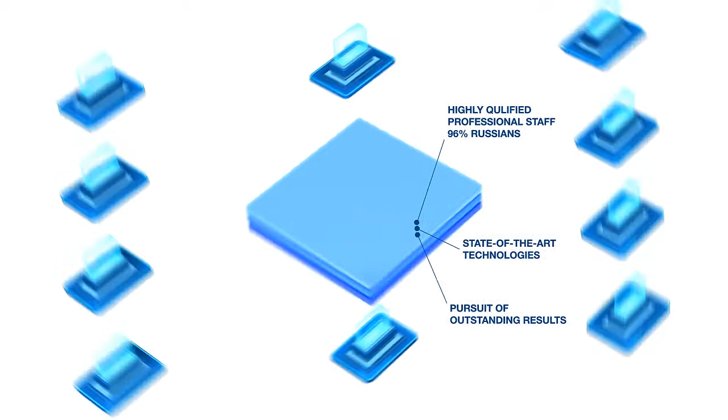This approach has created a strong, fit-for-purpose local portfolio that offers a wide footprint and deployment mechanism for high-end technologies from our global product lines.

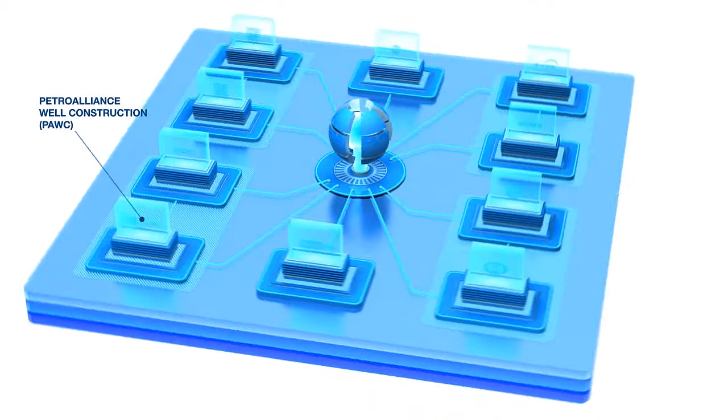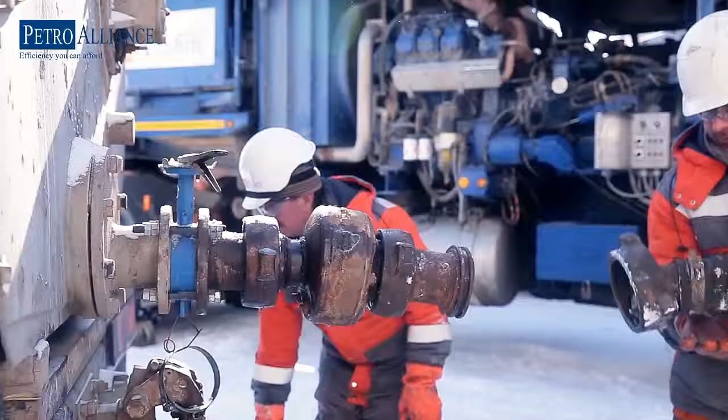Petro Alliance, a well-known brand on the Russian oil field services market for more than 15 years, was acquired by SLB in 2006. At the time, the company provided a range of wireline and well construction services, together with drilling and workover rigs. In 2011, Petro Alliance sold drilling rigs to Eurasia Drilling Company, the largest drilling contractor in Russia today, in return for their well construction service company and a preferred supplier agreement for more than 200 Eurasia rigs in Russia.

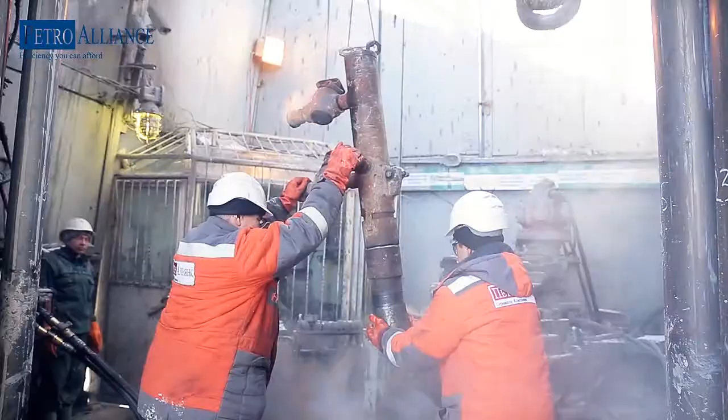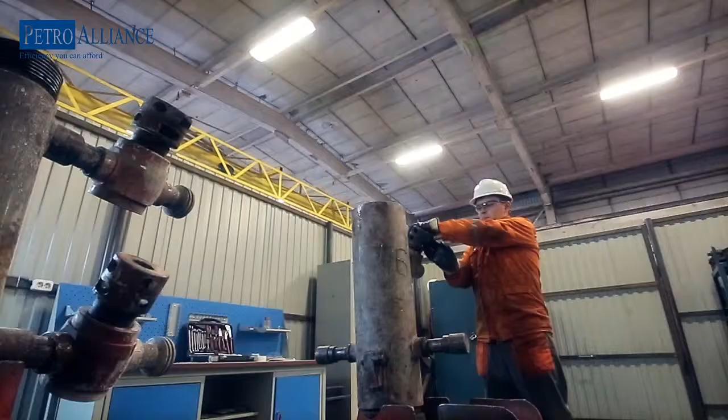The newly formed Petro Alliance now provides the following services: measurement while drilling, directional drilling, cementing services, and drilling fluids. Last year, Petro Alliance began to develop 2 new business lines: motors and drill bits, in cooperation with other Schlumberger segments, producing Radius and Smith bits. Today, Petro Alliance is one of the largest contractors on the Russian high-volume market.

More than 2,400 employees, more than 10,000 operations annually, more than 100 measurement while drilling and directional drilling crews using EMAG channel and mud pulse tools, more than 60 cementing fleets, more than 150 drilling fluids engineers. For instance, Schlumberger cementing fleets in Timan-Pechora and in Western Siberia were merged with Petro Alliance, and Petro Alliance today has over 60 fleets and is the largest cementing provider in Russia.

PetroStim was created in 2012 as a merger of Schlumberger fracturing fleets and Petro Alliance's fracturing fleet. As a result, it is now the largest fracturing company in Russia with over 17 fleets. The main objective of the merger was to create a new, lean fracturing company adapted to the Russian high-volume market.

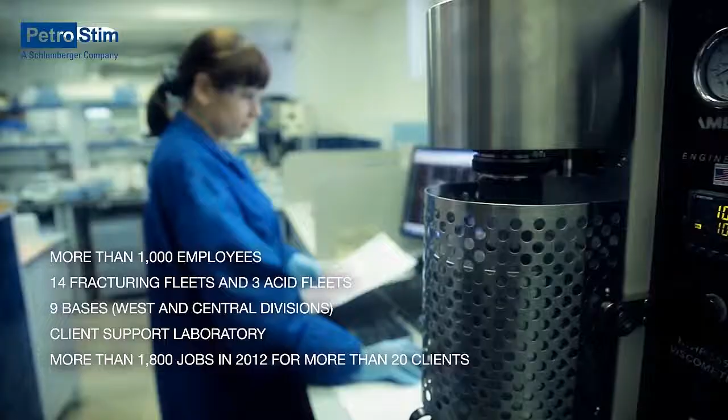PetroStim key facts: more than 1,000 employees, 14 fracturing fleets and 3 acid fleets, 9 bases, West and Central divisions, client support laboratory, over 1,800 jobs in 2012 for more than 20 clients, local manufacturing of some frac equipment.

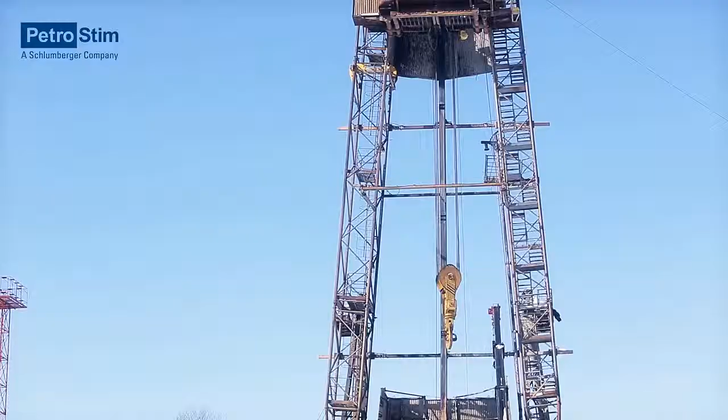PetroStim offers all types of well stimulation services: proppant fracturing, acid treatments, high pressure pumping, etc., and is positioned as a new technology leader in Russia. First refracturing applications with HiWAY, 25% of the Russian multi-stage fracturing stimulation market, and a leader in the penetration of unconventional shale oil reservoirs with major Russian operators. Currently, PetroStim is the largest well stimulation company in Russia.

Tyumenpromgeofizika, TPG, is a conglomerate of 3 companies acquired by Schlumberger in Russia in 2007. TPG is the largest independent wireline company in Russia, with over 140 wireline units and 60 mud logging units. It is also the most advanced geophysics company in Russia in the field of open hole logging.

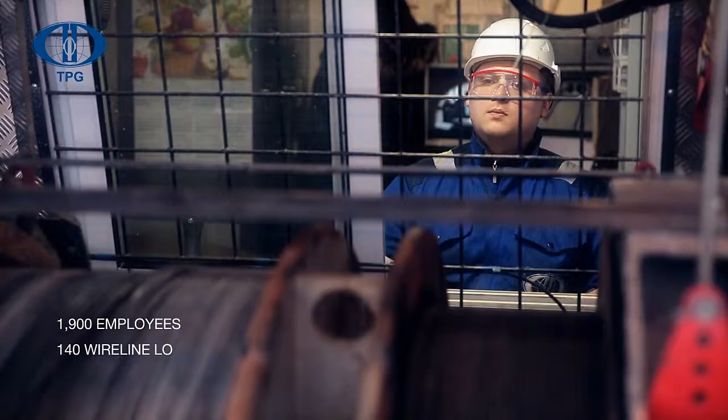Key facts about TPG in 2013: 1,900 employees, 140 wireline logging units and 60 mud logging stations, 25,000 operations. TPG uses equipment such as trucks, tools, and perforating guns produced by Schlumberger companies in Russia.

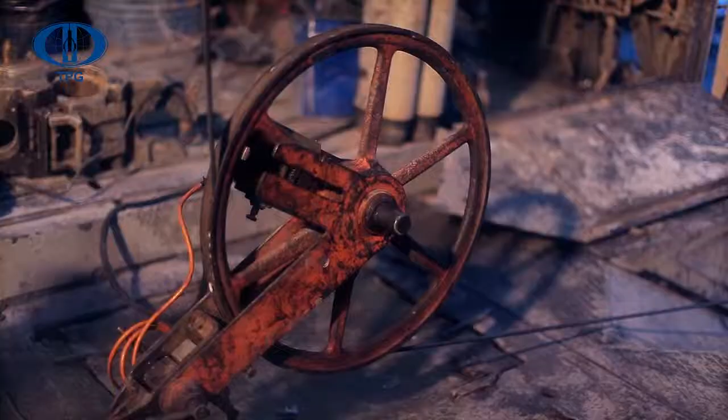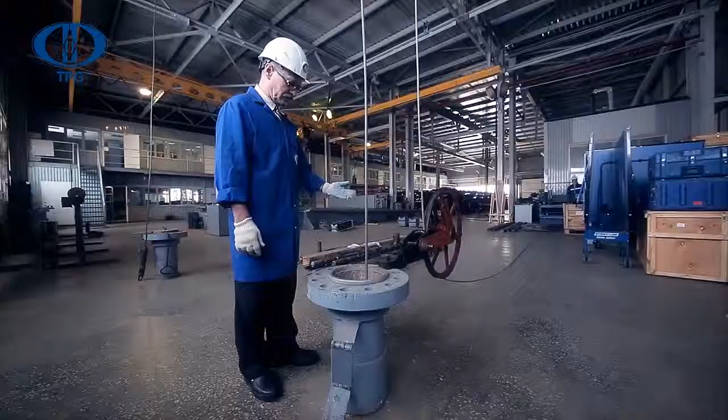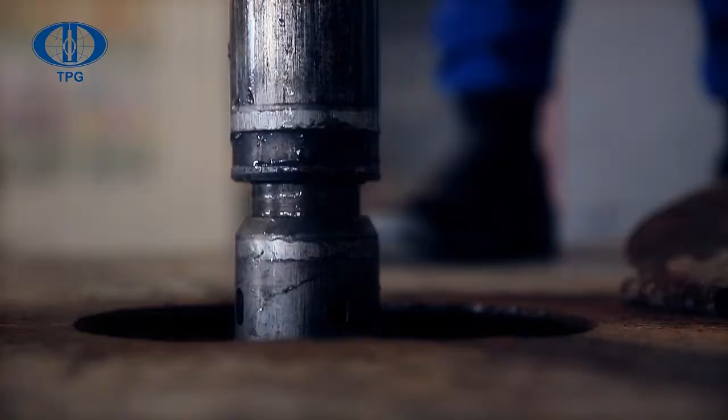TPG outperforms all of its Russian competitors in the following technologies: the Mega 3 73mm tool string, Russian HRLA high-resolution lateral log array tool, an option within the Mega 3 tool string, PLT06 production log tool for measuring the volume content of fluids in the cross-section of the wellbore, use of high-quality perforating systems made by Schlumberger in Russia at competitive prices, and use of Schlumberger Petrophysics software products.

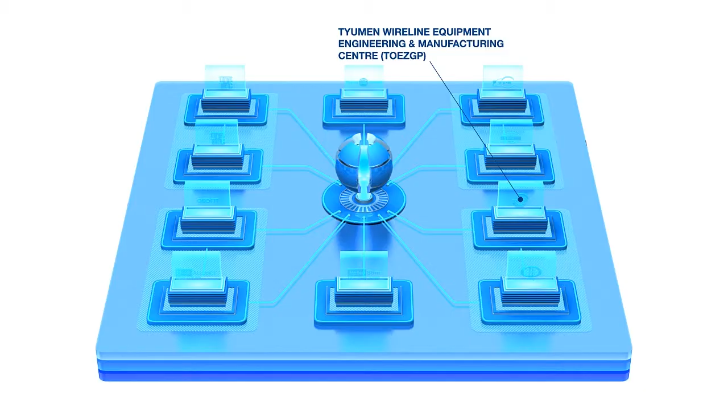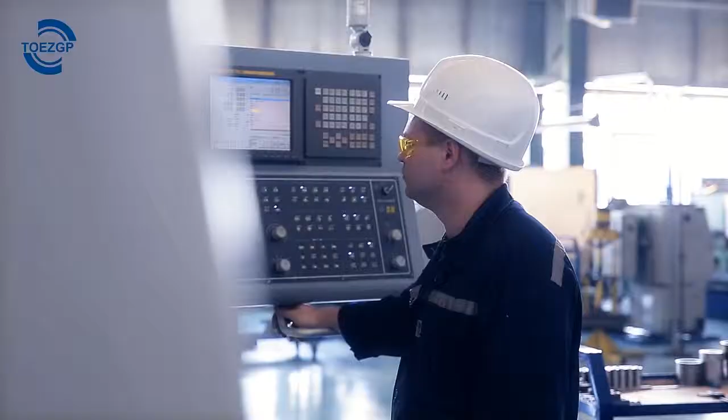Tyumen Wireline Equipment Engineering and Manufacturing Center, TOEZGP, was acquired by Schlumberger in 2007. The factory is a key player in Russia in terms of the technology of its tools and equipment for wireline logging in oil and gas wells.

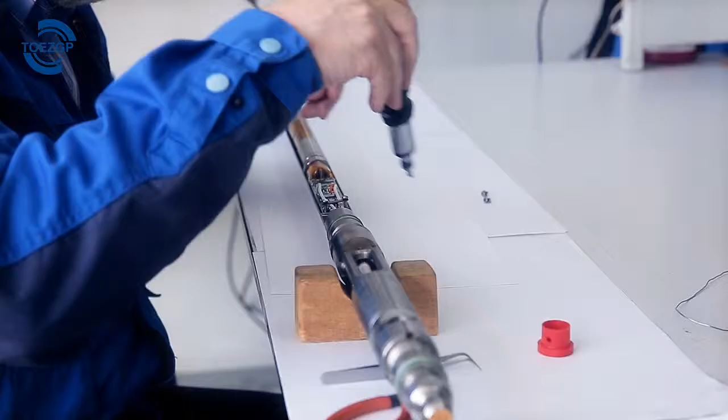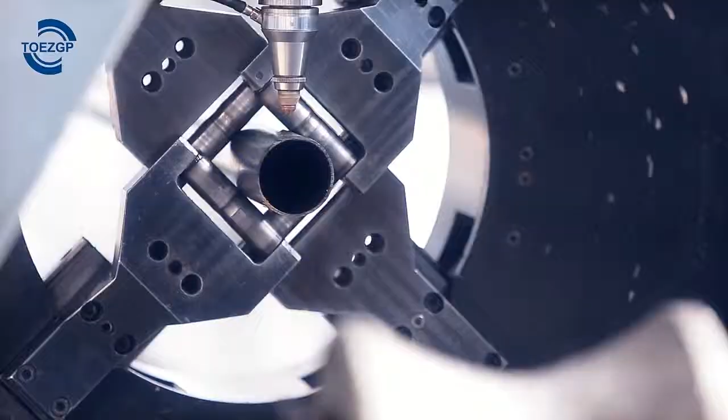Core products: surface and downhole tools designed for wireline logging and well perforating equipment, wireline trucks and helicopter transported wireline skid units, labs and dog houses, control units for logging, mud logging, and cementing.

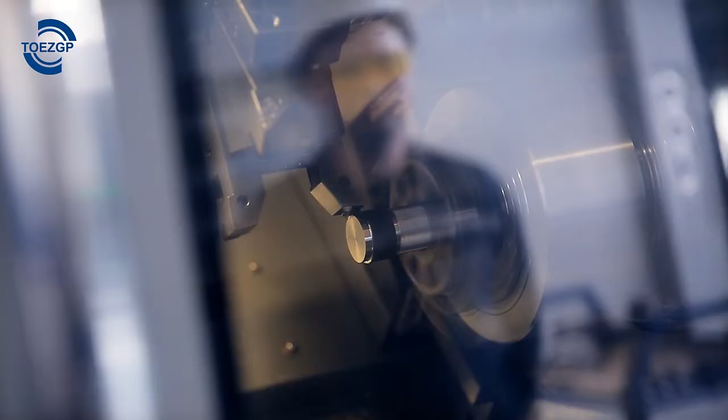One of our most competitive high-tech solutions in high-volume logging is the Mega 3 downhole string that includes sonic, induction, and high-end resolution slim lateral log array models. Mega 3 technology does not have a competitive equivalent in Russia.

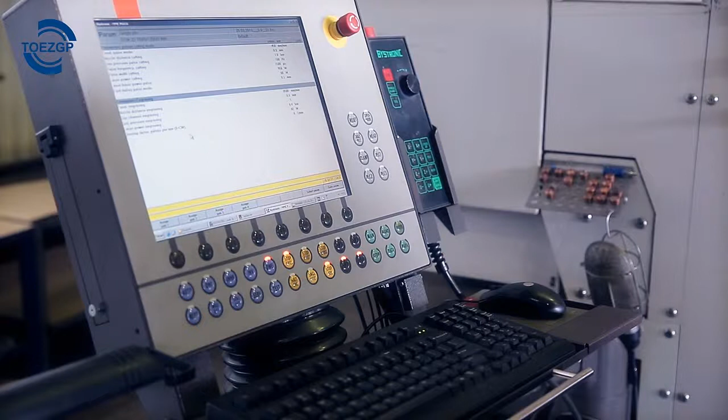New marketable technologies that the center's engineering and trial program is now focusing on include a wireline unit for high-tier logging, a lightweight wireline module for Russia, a drill pipe conveyed memory tool string on the Mega 3 platform, and development of production logging technology for low-rate horizontals.

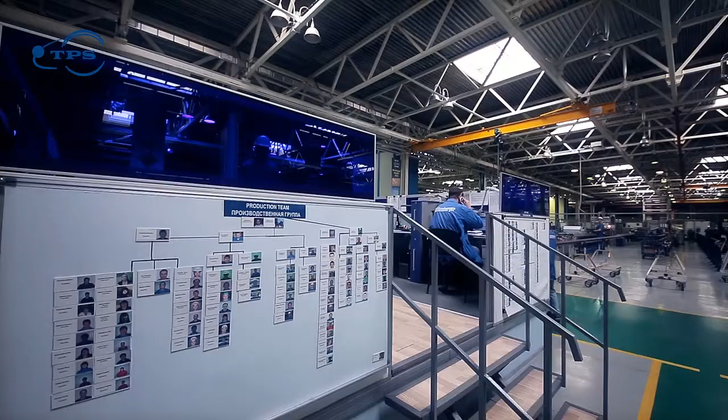Tyumen Pumps Schlumberger, TPS, was founded in 2006. It is one of Schlumberger's 3 pump production centers. The plant employs 180 skilled professionals and offers 4 main product lines.

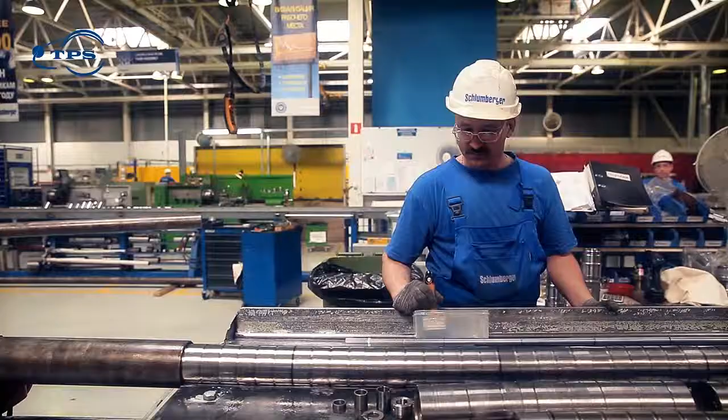REDA: high-performance, high-tier units for operating in severe conditions. TPS line: focused on the high-volume market, fit for purpose, developed especially for the Russian market - from Russia, for Russia. Easy line: mid-tier units at mid-price level. REDA HPS: horizontal pumping system for reservoir pressure maintenance.

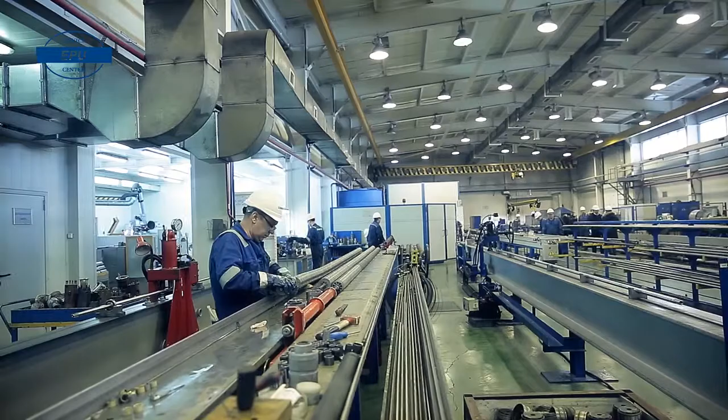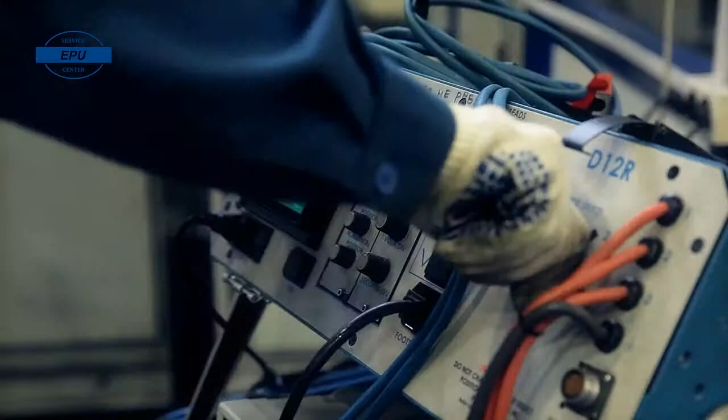Service Center EPU was founded in September 1998 as an artificial lift service company. In 2006, it became part of Schlumberger. Service Center EPU is the largest service department for this segment in the world. The company provides ESP lease services.

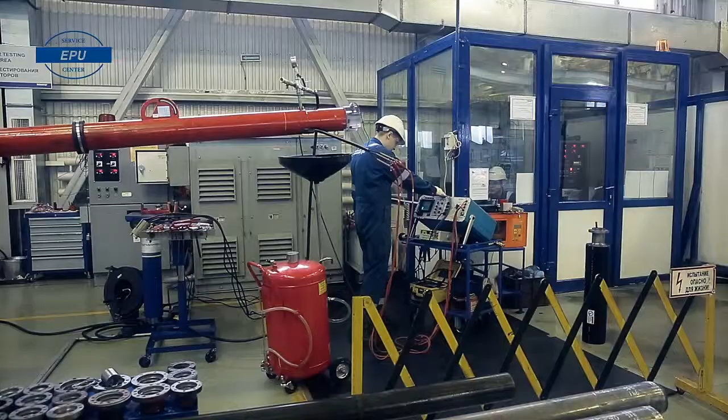SCEPU is a pioneer of the ESP lease business in Russia. Today, the lease shop continues to strengthen the position of the artificial lift segment in the equipment service and lease market. More than 3,400 wells belonging to 13 customers within a radius of about 1,000 kilometers are now in operation under 24-hour supervision.

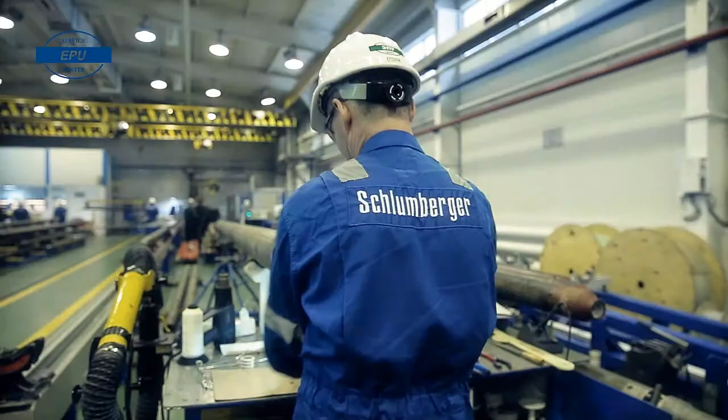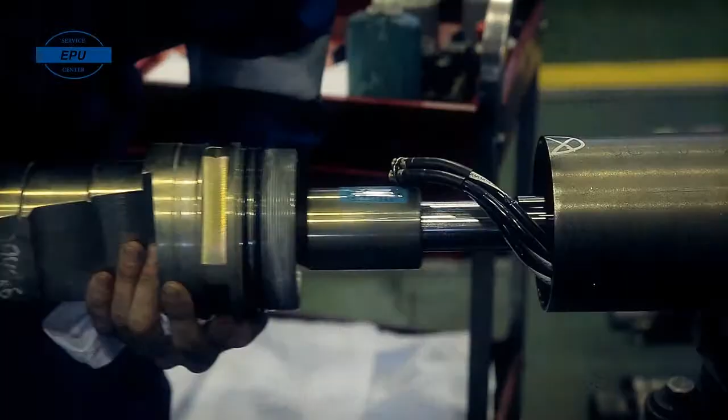Maintenance and capital repair of local and foreign ESP systems. The equipment repaired ranges from A to M series, with external diameters from 85 to 220 millimeters, and 103 millimeter, 117 millimeter, and 130 millimeter motors. Cable repair.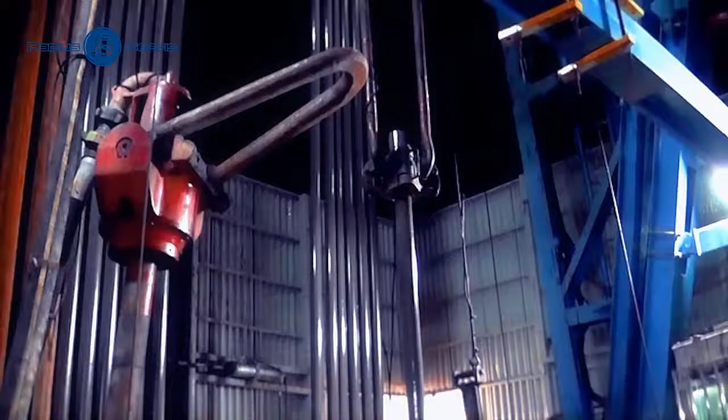Schlumberger started to work with Radius in 2000. In 2005, we bought a 40% stake, and we acquired the remaining share in 2012. Today, the company employs more than 1,100 people, has a large production base with state-of-the-art equipment, and is recognized as a leading manufacturer of cutting-edge products for oil companies and drilling contractors.

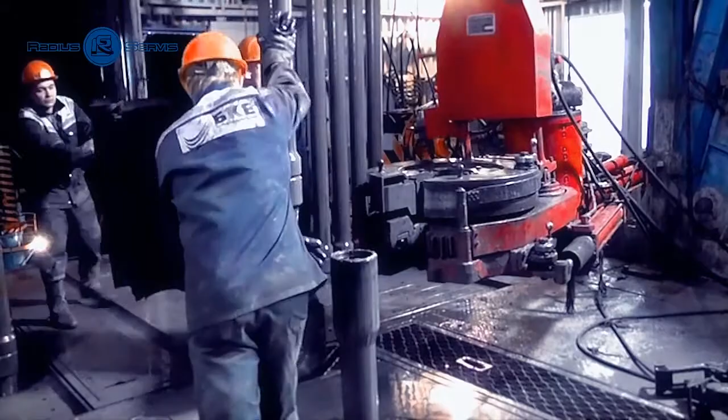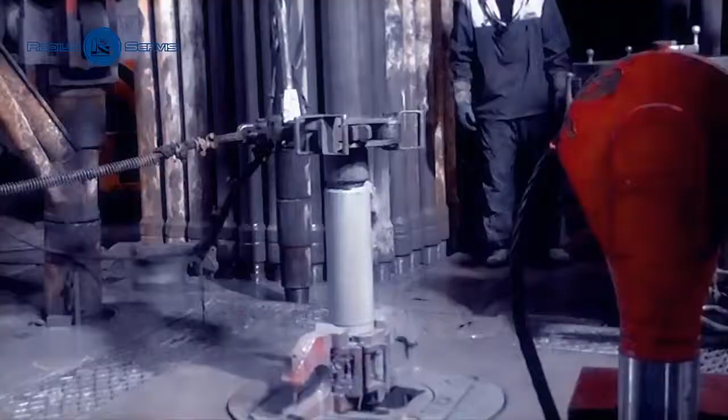The positive displacement motor is one of the company's key product lines, with an output of up to 100 motors and power sections every month. Other Radius Servis products include jars, shock tools, drill stem elements, core barrels, and whipstocks. Thousands of horizontal wells, directional wells, and sidetracks have been drilled in Russia with downhole tools made by Radius Servis.

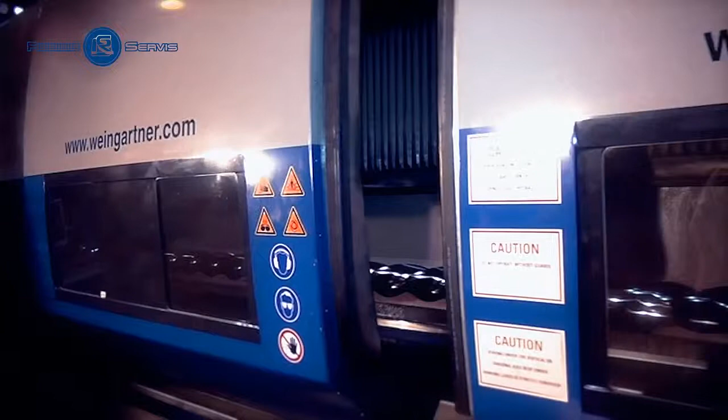One of the major aspects of the company's business is its chain of service centers in oil field locations throughout Russia and the CIS. Through its service centers, the company not only rents out and maintains its own fleet of downhole tools, but also offers inspection and repair of customer-owned products. Only highly qualified personnel handle all types of work.

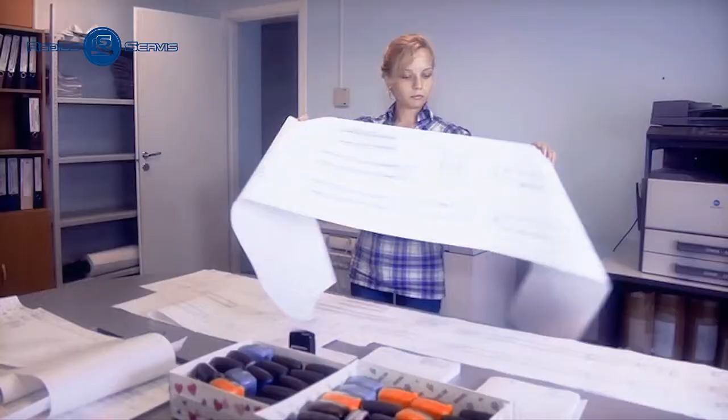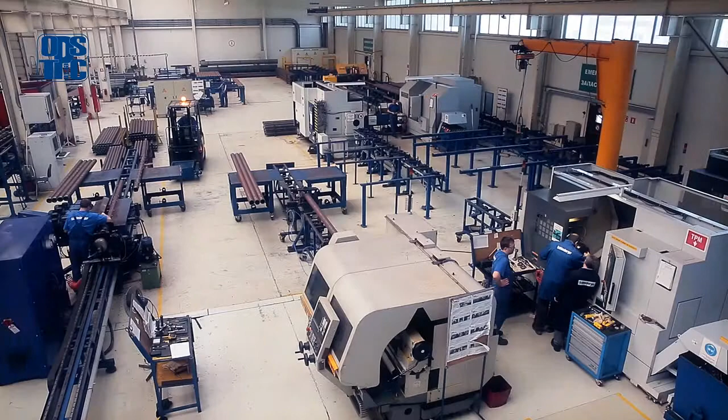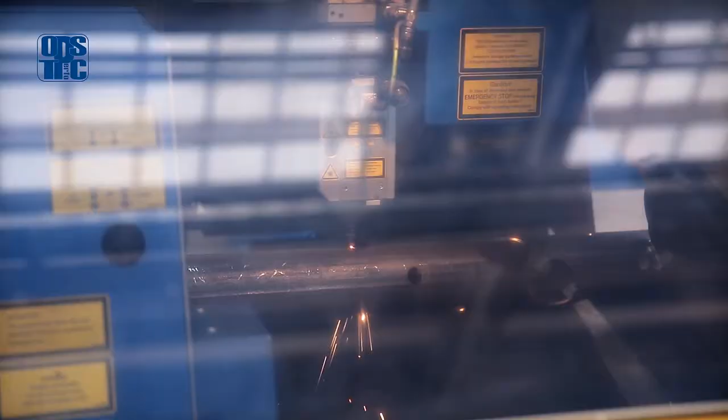Production of Schlumberger perforating systems in Russia was launched in 2005 on the basis of two product centers: Ufa Product Center in Sterlitamak, which manufactures Schlumberger shaped charges, and Tyumen Product Center in Tyumen, which manufactures Schlumberger perf guns. Both product centers are reliable suppliers of products characterized by safety and reliability, unique design, and strict requirements in terms of quality of materials that eliminate human error and technical failure of the product.

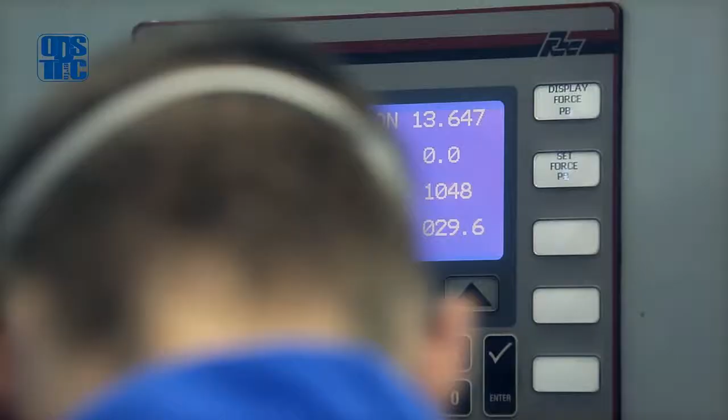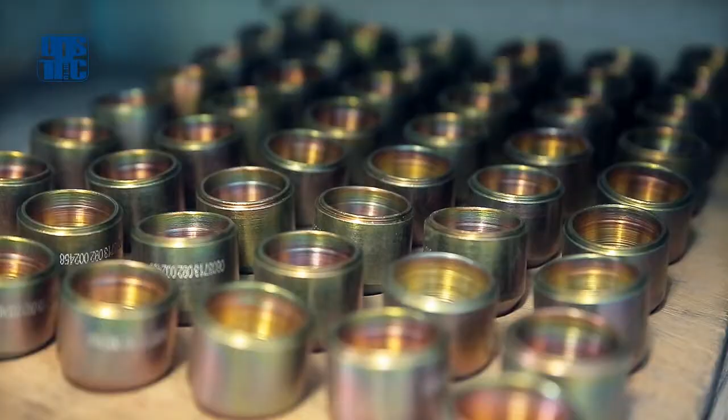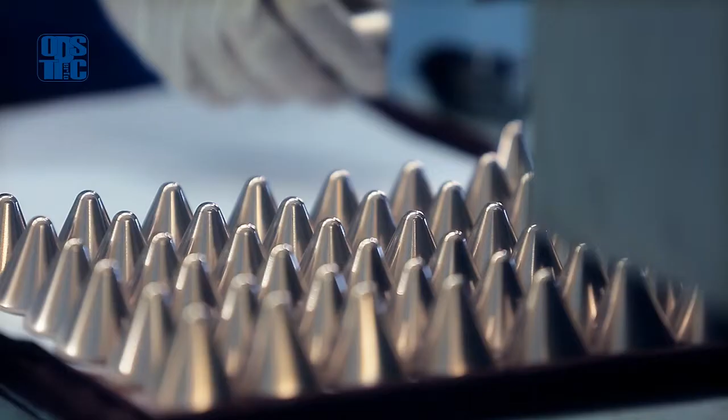Quality is guaranteed by the latest equipment, quality management systems, and lean processes, ensuring that the product is certified to local, US, and European standards. Competitive price is achieved by fit-for-purpose production, sourcing up to 96% of raw materials locally, and efficient logistics, including our own special purpose vehicles and distribution centers.

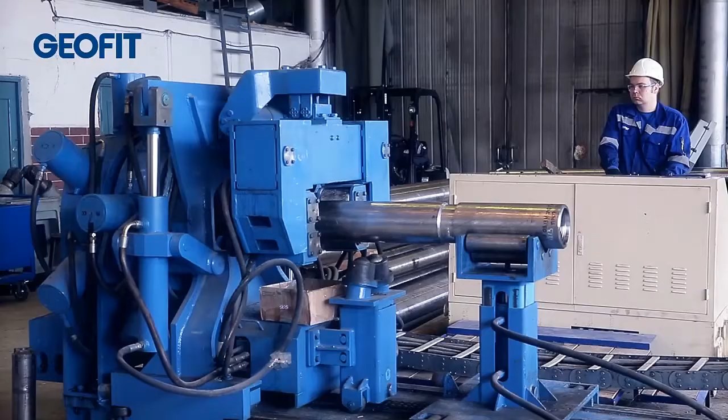The first company that we acquired was Geofit in 2002. Geofit provides the leading electromagnetic telemetry system in Russia. Geofit has been producing oil field equipment in Russia for 35 years. In 2010, a new generation SIB system was launched into mass production.

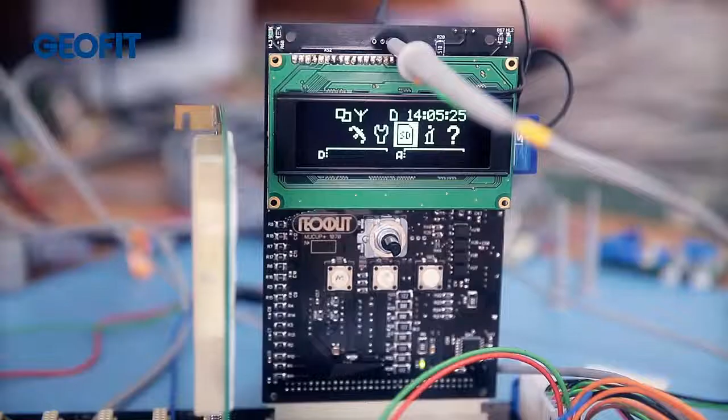This system boasts excellent technical and economic performance in the Russian market. Other Geofit solutions include CUB, a drilling control system intended to display and record the status of drilling processes, and GeoBay software for operational support centers, an application that collects data from drilling rigs and provides access to real-time information in the office, as well as hook load, traveling block position, and rotary speed sensors, pump stroke counters, rig monitors, and pipe screens to support drilling and measurement in Russia.

We're not blindly applying our standards. We're making our processes and our technologies available only if it will further enhance the market position of the acquired company. I think that the future of Schlumberger in Russia land relies heavily on the acquired companies.

Take the Bazhenov fields, for instance, which are estimated to be 5 times the size of the Bakken Shale in the United States. Massive multi-stage fracking and horizontal drilling campaigns will be necessary to make the Bazhenov economical. Today, the typical well cost in the Bazhenov is around $10 million, and it will not be economical even if the mineral extraction tax or the export duty tax are set at zero.

I truly believe that the acquired companies are best positioned to bring an affordable, reliable, and efficient solution to the development of the Bazhenov formation. We can already see the trend now. In 2013, the acquired companies have grown more than 26%, which is faster than the rig count growth and than the traditional blue segment.